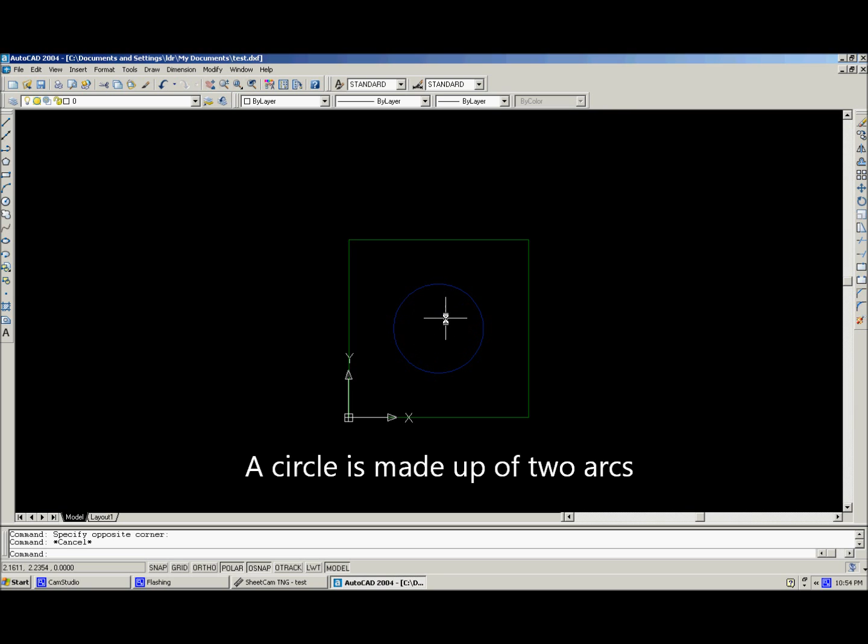In this video I just want to touch on some basics as far as good rules of thumb and good drawing technique. This drawing here that we have used in the other videos as a simple test drawing is actually a pretty good drawing because it's made up of lines and arcs, or in this case a circle, which is 2 arcs. Many drawings you get, especially downloaded from the internet, are made up of nodes, tiny lines.

The machine will cut them, and many times they'll cut them just fine, especially since most of those you're downloading are for art. It sounds like a sales pitch, but honestly with a lot of the art stuff you like it to be a rough edge. You don't want to cut a tree out and have it look like a perfect symmetrical tree, because that's not what trees really look like. So sometimes it actually works to your advantage that they're drawn that way.

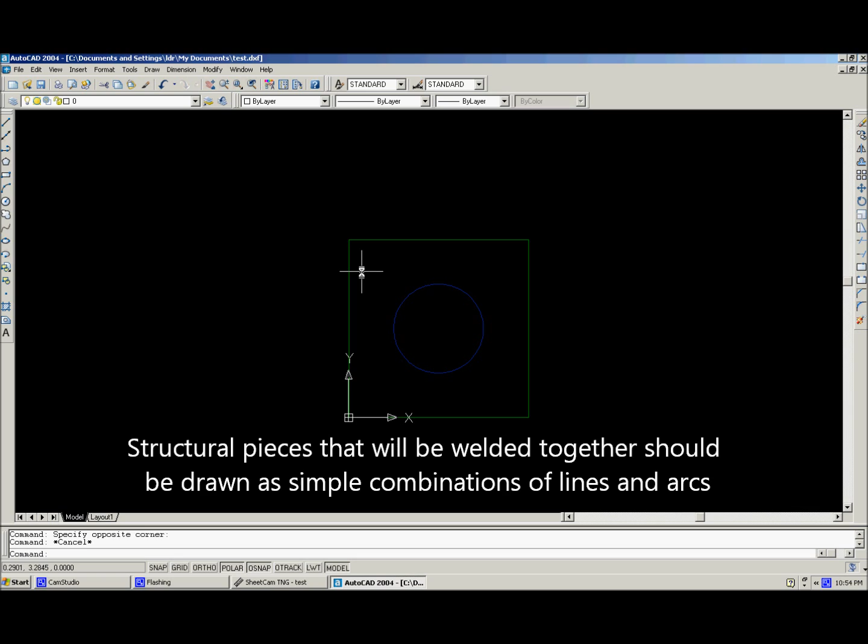But when you're trying to make structural parts, or parts that have to fit together nicely so that you can weld them, it actually is better the less stuff you have. Less stuff, what I mean by that is, it should be made up of lines and arcs. One long line, or a nice swooping arc, instead of an arc that's made up of 900 little tiny segments.

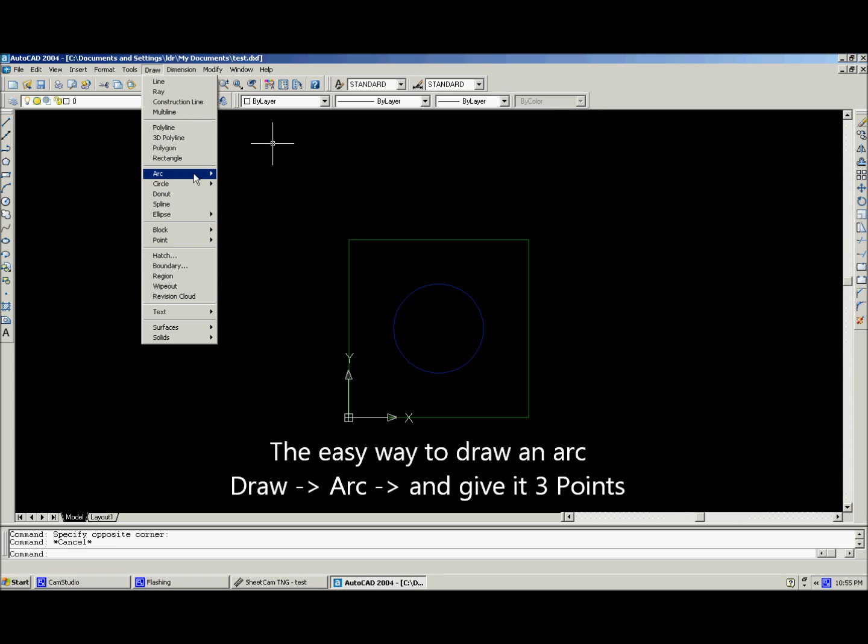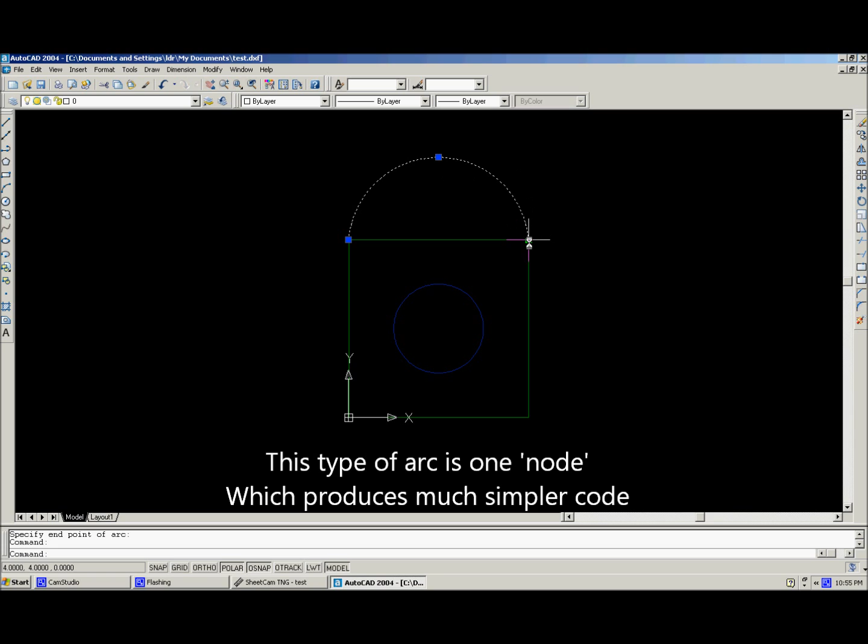To give you an example, if you wanted to draw an arced top to this, you could do it several ways. The easiest is just draw an arc and give it 3 points. You could snap there, go to the center and snap, and then snap to the end. And that gives you a nice arc. If you click on this, you'll see that it is one entity. It is one node. From this point, curving all the way up down to here, is to the computer one piece of information. It's one object.

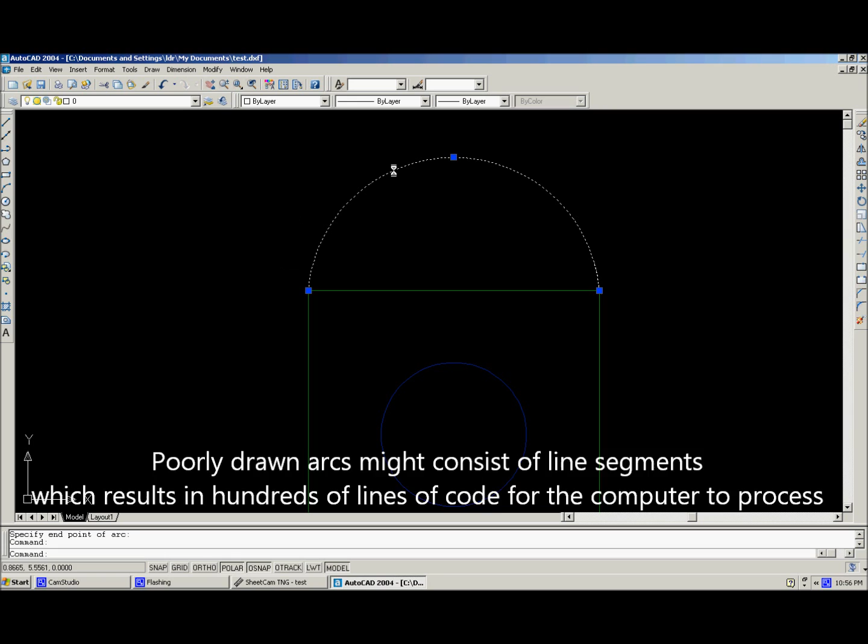Whereas a lot of drawings will be made up of tiny little lines, and they'll resemble an arc, and to the naked eye they will be an arc, but when you zoom in, they're tiny little lines. Again, the machine will cut it quite well, all things considered, but basically it is a gazillion lines of code to get from there to there, and the machine has to read each one of those, and it ramps the motors up and down accordingly on each one of those nodes.

This will be one line of code to cut this whole arc out. If you were to draw it in line segments, this might be 200 line segments, which would basically be 200 lines of code. So obviously it's not as efficient either. The other thing with drawings is to make sure that your objects are connected.

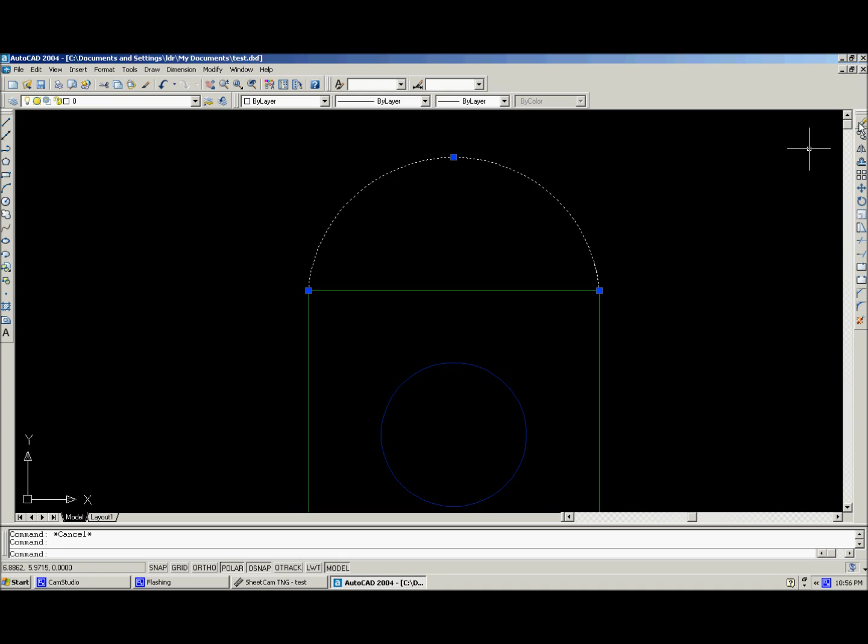Take this for example. I'm going to purposely move this away from there. Okay. So it is not connected. What'll happen is it'll pierce and it will cut, but it's going to leave that. It doesn't know that you meant to connect that. So all your paths should be closed, unless of course you're just cutting a slot, and then obviously you don't want them closed. But basically all your paths should be closed. Otherwise you're going to get a lot of pierce points.

If another line was drawn in between here and it wasn't touching on either end, it's going to pierce there, and there, and it's just going to be a mess. So drawing quality definitely plays a part in cutting efficiency and in cut quality. The other thing to go along with this video is I want to save this and show you in SheetCam some quick indicators that will tell you what your drawing quality is like.

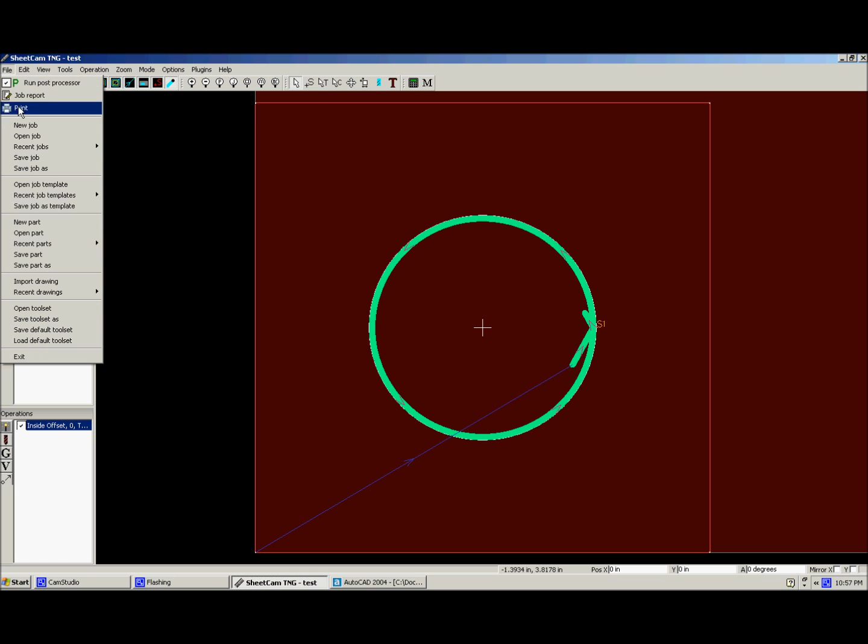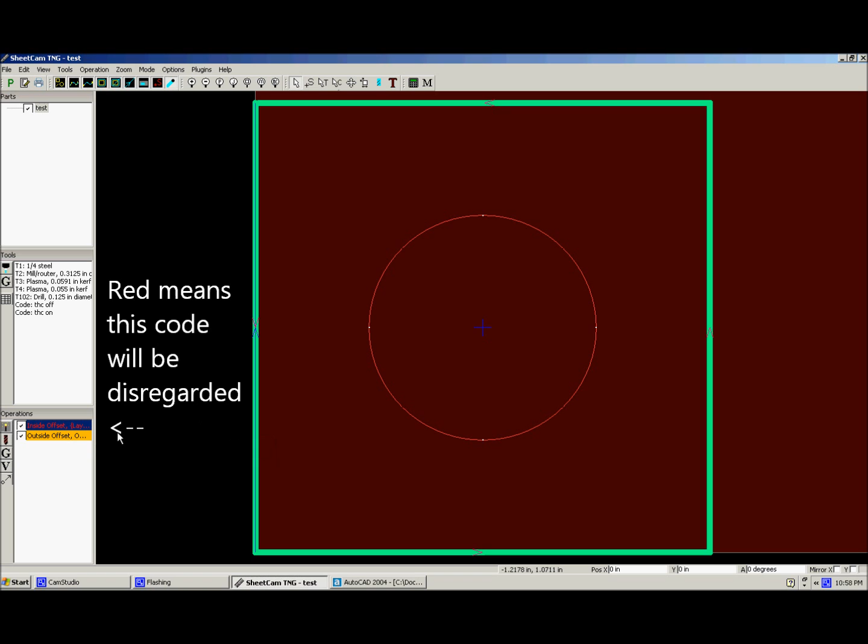If you notice the red one, red means it's not going to do anything. It just totally disregarded all of what you told it to do. If you move the cursor over, it will explain why. Basically in this case, inside offset, I told it to do it on layer inside. This layer does not exist. No paths were generated. Well, obviously, if the layer doesn't exist, it can't cut that layer.

But that gives you a really quick visual indication as to whether the machine is even going to remotely cut the way you want it to. If you see code over here or lines that are red or yellow, you need to stop what you're doing, put the cursor over and figure out why.

It may, and it isn't always a problem, it may do it anyway, but it's not going to do it exactly as you told it to, and you really should figure out why. So the red means I'm not cutting anything. I'm not going to do what you told me to do because I can't. I blatantly can't do it. So that obviously you need to find out. And 99% of the time it's because the layer doesn't exist.

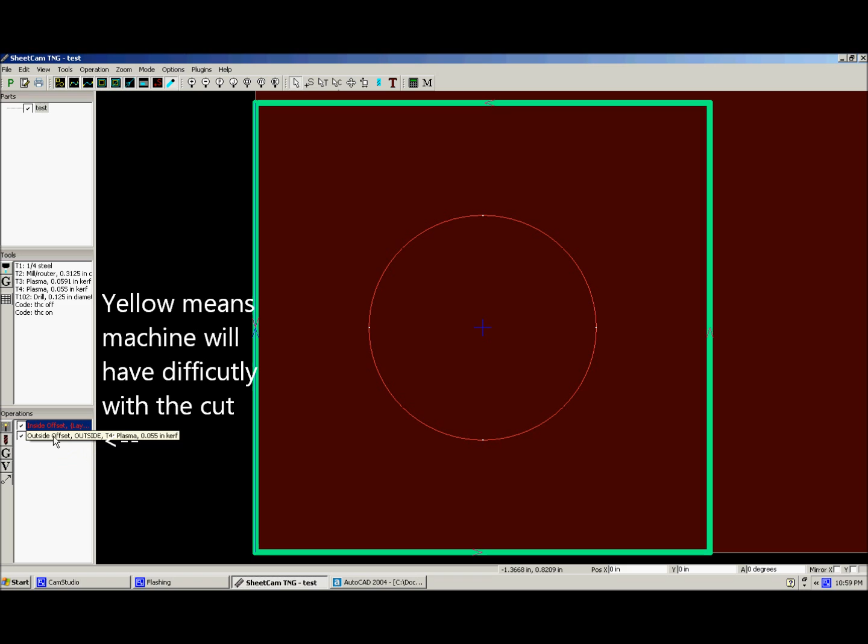The next one, yellow, is basically saying I'm going to cut it, but I can't cut it the way you told me to. And the reason is because open paths were not offset. An open path is where there's a gap. So if we zoom in here, remember how we saved, there's an open path here. Well, I told it to offset the line. If it is an open path, bear in mind, it has no idea inside and outside of what.

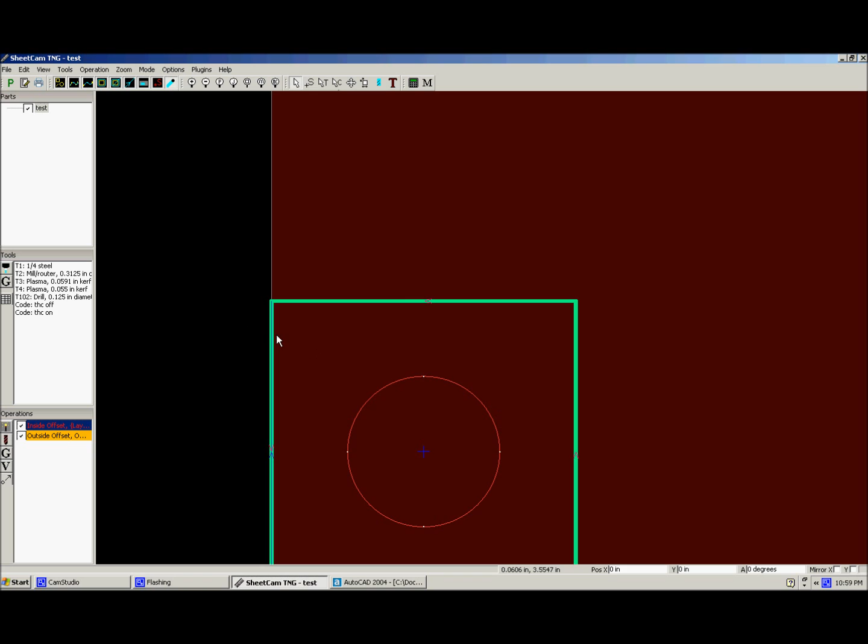Because for us, we simply look at it and say inside the square. The computer looks at it and says, that's not really a square. It's 4 lines that are drawn. They might as well be 4 straight lines. It has no idea that that is supposed to connect there. So just 2 brief things to bear in mind when you're doing your drawing. Close the gaps. This gives you a brief visual indicator as to whether the code is good.

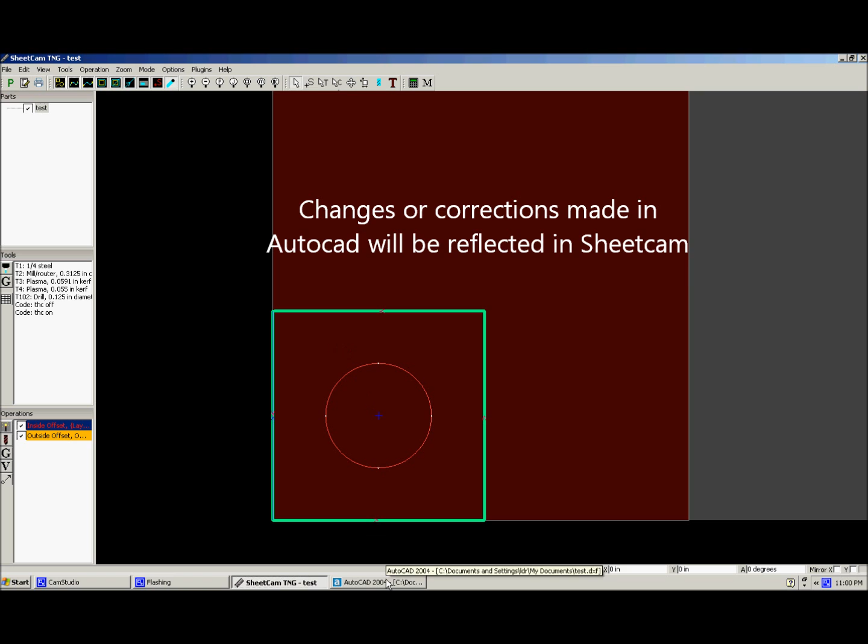The great thing about SheetCam and AutoCAD working together is SheetCam does not grab the program. What I mean by that is we can still go back into AutoCAD and let's change this, let's fix it. Now I didn't change anything in SheetCam, I left it all incorrect. Now we see that there's a problem. Let's go into AutoCAD and let's fix our problem. So okay, we need to close that up, that fixes the one.

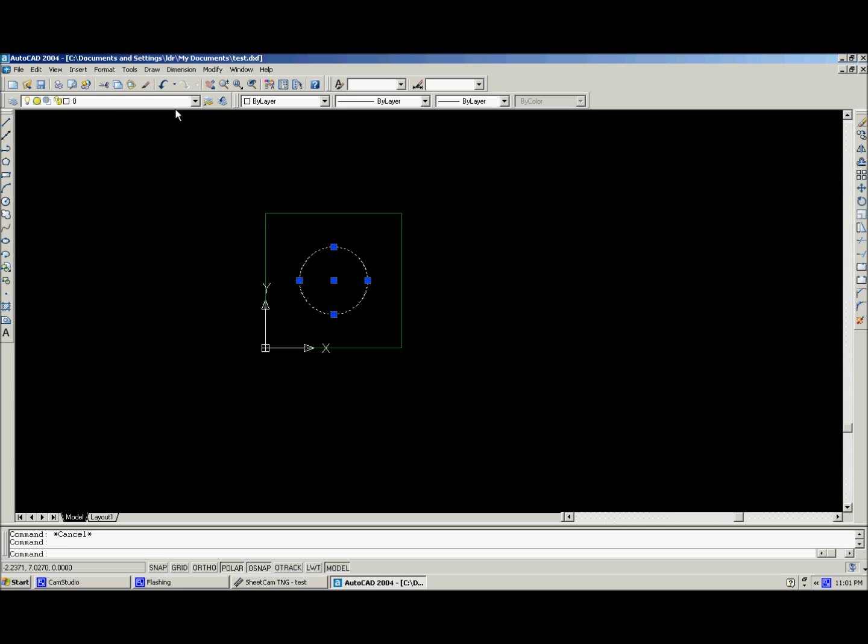The other one is the layer isn't found. It's because it's on inside layer. We'll change that to 0 layer. We'll save it again. Override it, yes. Now we can go right into SheetCam. Recent drawings, test. Okay. And boom, see, our code is white. It actually is going to cut both of them. And I didn't have to double click on the processes, and I didn't have to set up new processes.

The same thing with, let's say you're going to be cutting a lot of this particular thickness and style steel, the 1/4 inch in our example here, and I'm making lots of different shapes. I can do one and cut it and just leave the code as long as I leave my layers the same. And I don't have to redo it. I just have to open it up and then click the P, post-process it, and we're ready to go. When you get used to it, it's an extremely fast and efficient process.

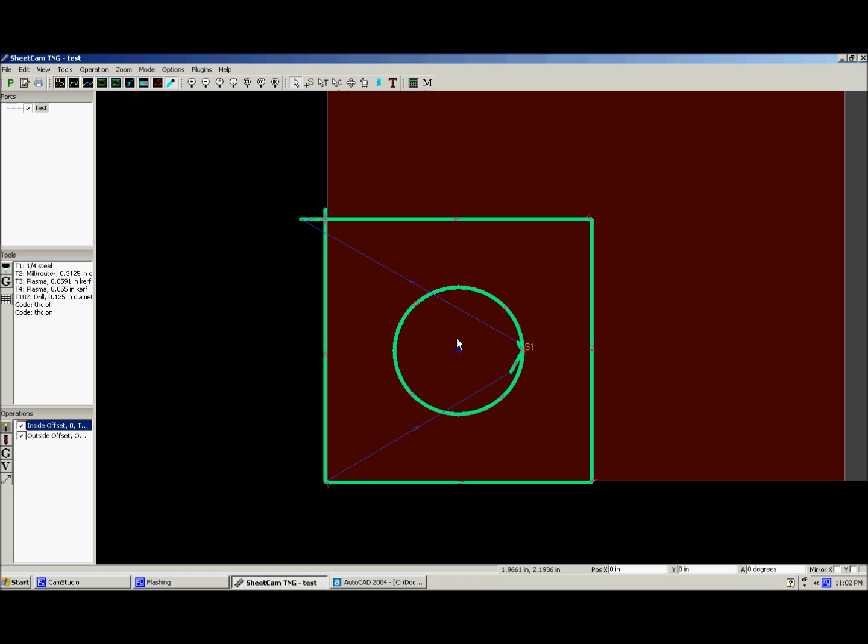You could go from basically drawing the square or a bolt hole pattern or a wheel spacer, for example. You can literally draw that in less than 30 seconds once you get comfortable with CAD. You can bring it in here and generate the code in roughly 30 seconds to a minute. Once you bring it into the control program, move the machine, it might take you a minute and a half to set your settings there, and you're cutting. And in less than 3 minutes total, you've got a part in your hand. It is pretty amazing with just a little practice and a little patience that you can become very fast at this.

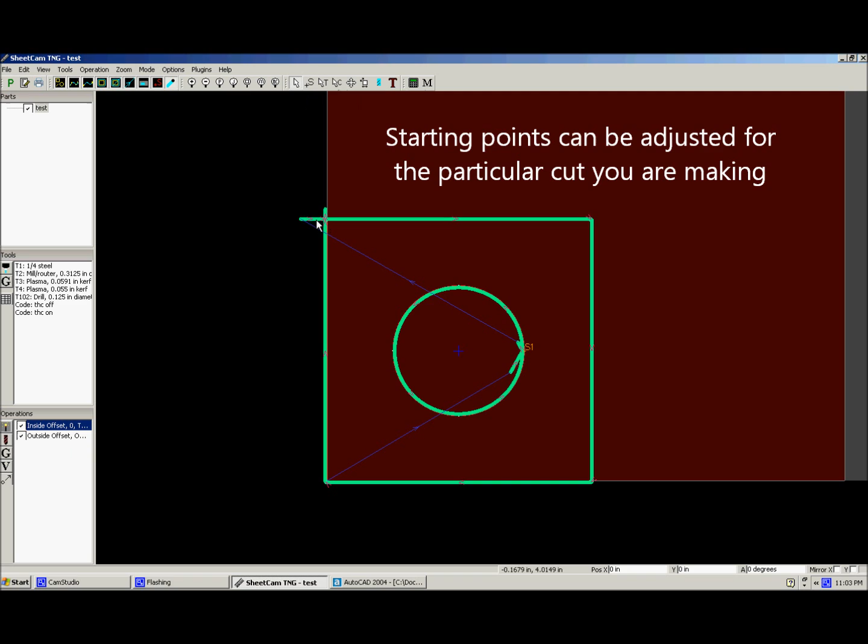So drawing quality definitely plays a role. And also bear in mind your visual indicators here. If they're lighting up a different color, they're trying to tell you something. The one other thing I forgot to mention in the other videos is starting points. For example, on this one, you can see that your starting point is off out here. So now we have to make sure our edge of the sheet goes all the way there. You click the S and then the layer that process is on, and you can move your starting point, which is really handy if you're using scrap or if you're nesting things.

You've got another piece that's shaped somewhat like this, and this is definitely going to be waste anyway. You can move your starting point to there. Same thing with the inside. You just need to make sure you click on that layer, and then you can move it anywhere around here. Typically inside doesn't matter as much because that is your scrap piece. But it's really handy to be able to move the outside one especially, so you can get right up to the edge of a sheet, or if there's a space in between the two that's definitely going to be waste, you can put your starting point there.

And just take your time doing drawings. Let SheetCam show you what it's going to do. Take the time to look at the actual lines and see that they're what you want them to be. There's our green line which we drew, the arrows indicating our direction of cut. Make sure these aren't lit up any different colors, and then go ahead and post it and cut it out.